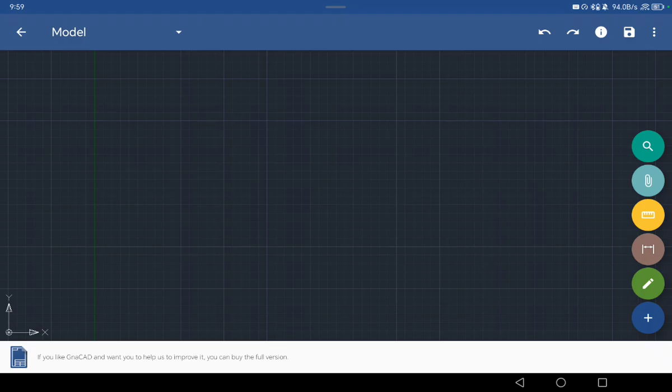So since these are modified tools, it is very essential that we have first drawn our objects or shapes. So for this time, let us use the rectangle command.

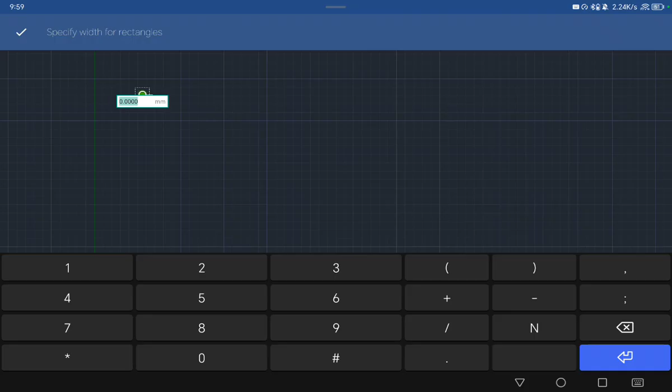Confirm check, then let's set our dimensions. Our rectangle, for example, is 300 mm. Then the width of our rectangle, let's say 200 mm. So for example, this is our object.

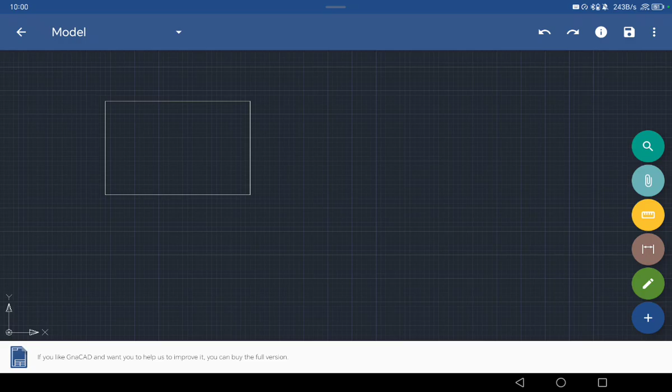Last time we also discussed the different kinds of modified tools that are commonly used. So we are going to use our copy command or clone command. First thing is to select the object, then go to the three dots at the upper right corner. Then click copy. Then, as shown in our instruction, specify base point.

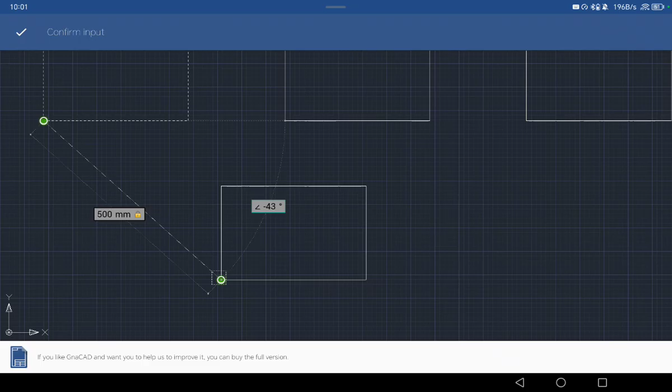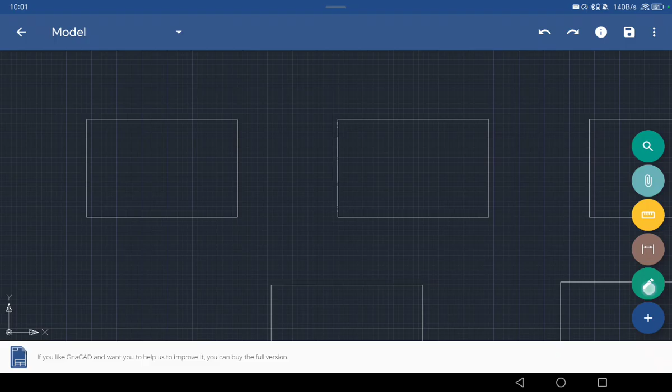First thing first, I'd like you to use this first box, our first rectangle. Since it is a modified tool, as I said, we need to have shapes or drawings ready first. So let's click here since we need a modified tool. Let's click the pen tool, then let's look for fillet first—offset, rather.

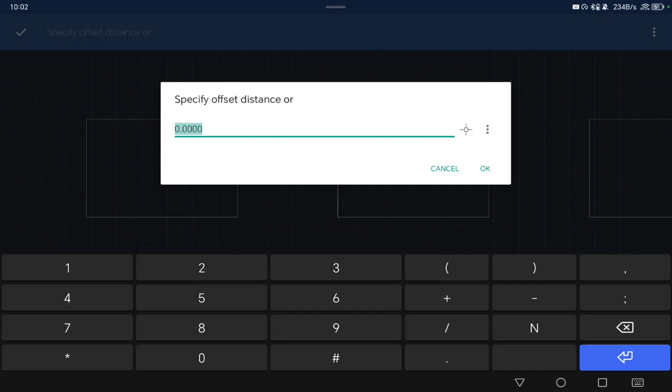So for example, this one, let's set the offset to 50. Okay, then upon setting our offset as 50, automatically this instruction appears: select object to offset. So this is what we'll use.

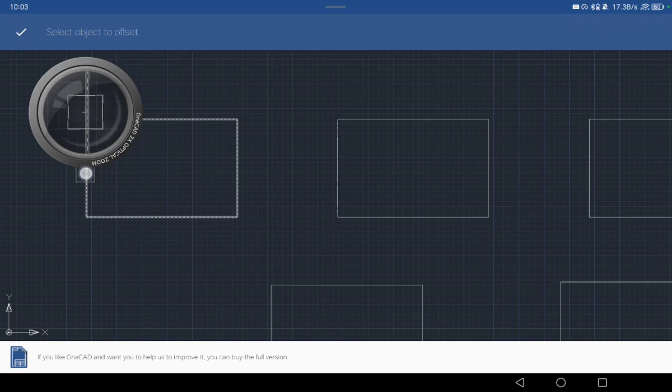Now it shows: specify point on side to offset. For example, I want to offset inside. So that is 50 millimeters offset inside. So it got removed and replaced again.

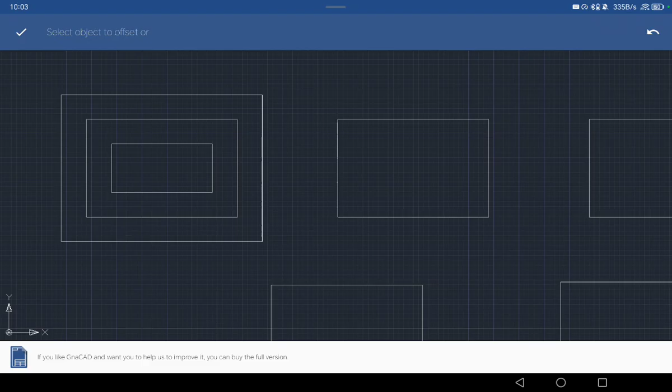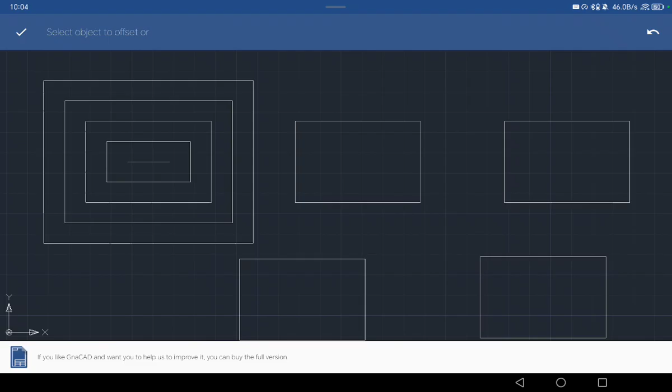Again, same sizes—same shape, different sizes, but the gap between them with each other is the same. So that's what we mean by offset. For example, the gap between this box and that box is 50. So that's what we call the offset distance we mentioned earlier—that refers to the offset distance, the gap between them.

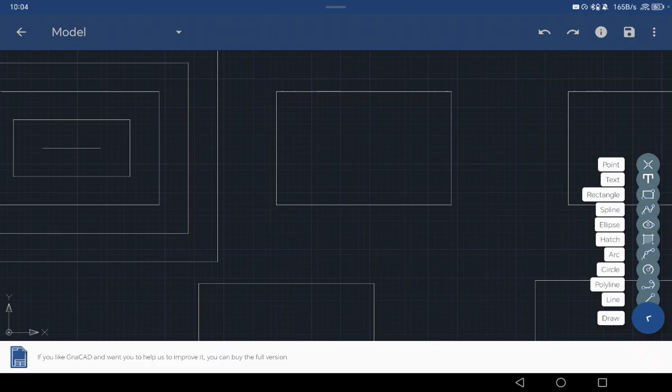Next, let us try to create a line inside this one. Let's draw, then connect here. Then we wanted to offset. These are what we can do with that.

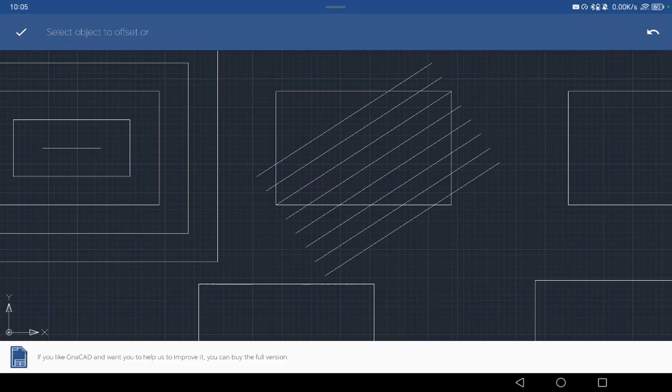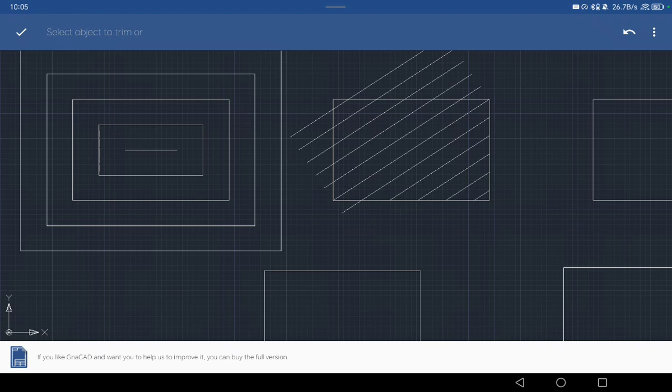Then if you wanted to erase that one, you can use—let's release this first—you can use trim. The parts that extend beyond, you can trim. During trimming or anything, we can zoom in or zoom out our drawing area to be able to maximize the functioning of our CAD.

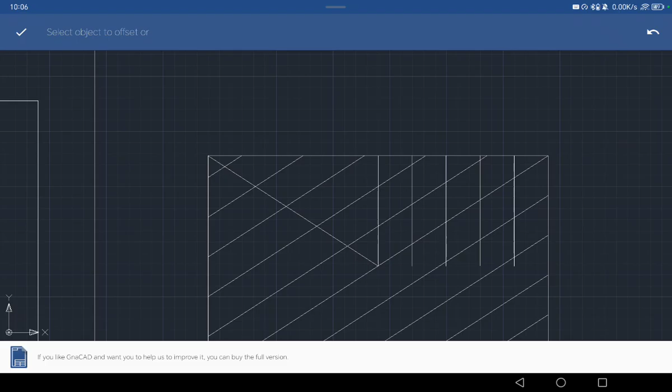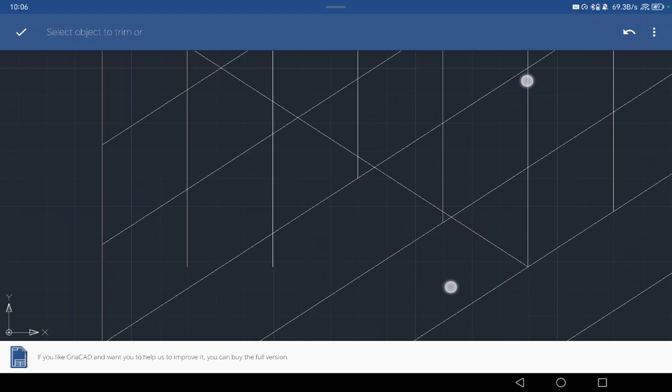Ayan, trim lang natin yung mga lumagpas. So, while you are doing this, mas marirealize mo na mas madali pa lang mag-drawing once you know yung different tools na kailangan gamitin. Like this, ito lang naman yung kailangan kong lagyan ng guhit. So, ganun. We already have our object here.

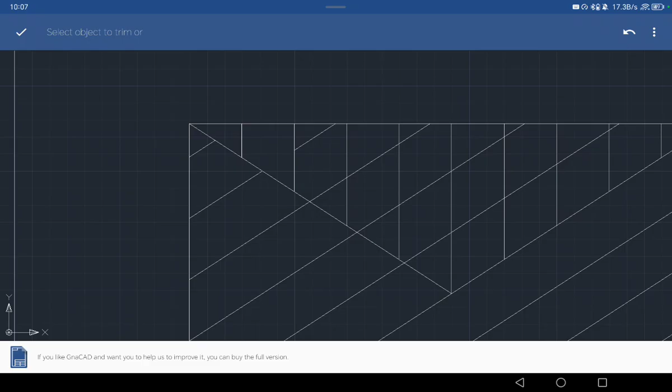So, for example, gusto kong i-erase to, i-erase din. Yan. The problem with erasing or trimming is paisa-isa pagka talaga. May time na paisa-isa ka mag-trim. Ayan po. But then, you already created yung object mo. So, that's it, that's offset for you. Kung may application yan by next time, tuturo ko sa inyo yung pinaka-application niya once we started creating floor plans. Next, we have here another box.

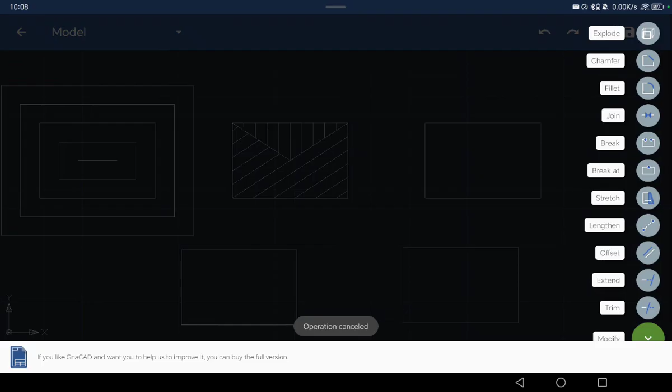Then, we are going to use itong ating fillet. So, pag sinabing fillet, we are going to turn yung corner nito as a rounded shape. So, by default, halimbawa, ayan na, cancel ko lang. By default, pag ito yung fillet natin modify tools, tapos fillet. By default, ito yung pinaka niya. Select first line or we have options here.

Pwede pong polyline, pwede tayong mag-radius, pwede tayong mag-trim, pwede tayong mag-multiple. So, when we say trim, magpuputol lang tayo, magtatanggal tayo, magbubura tayo. But I would like you to use yung radius. Ito yung pinaka-commonly used talaga dyan. Radius.

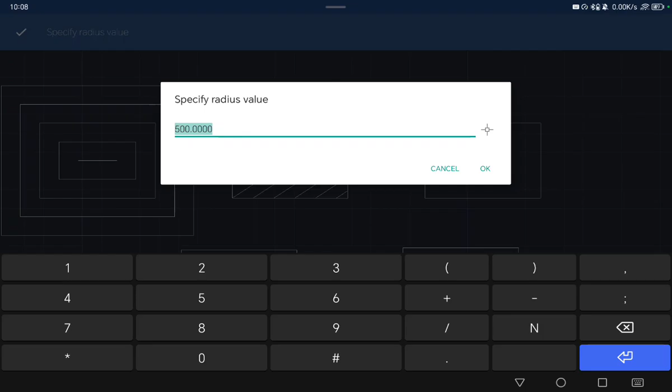So, sa radius, nakalagay dyan, specify radius value. We can change that one. For example, I wanted to change it to 100. Ayan po. Proceed na tayo dito. Specify first line.

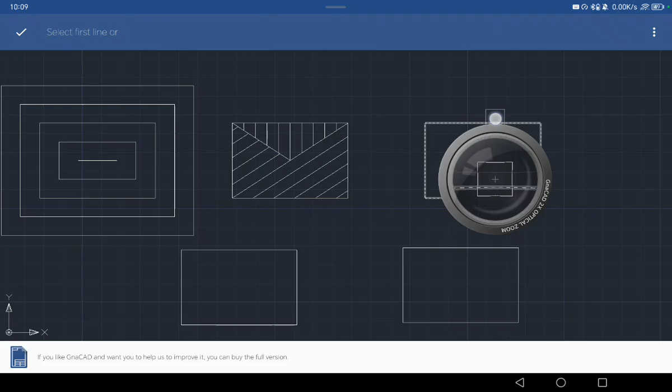So again, hold natin siya. Specify niyo lang nasaan yung first line na gusto niyo, yung side na yun. Once again, kailangan makita natin na naging putol-putol yung linya bago natin i-release. Once release, ito yung lilitaw. Specify, select second line. Ito yung second line natin. Then, release. See? Ito po yung itsura ng ating fillet.

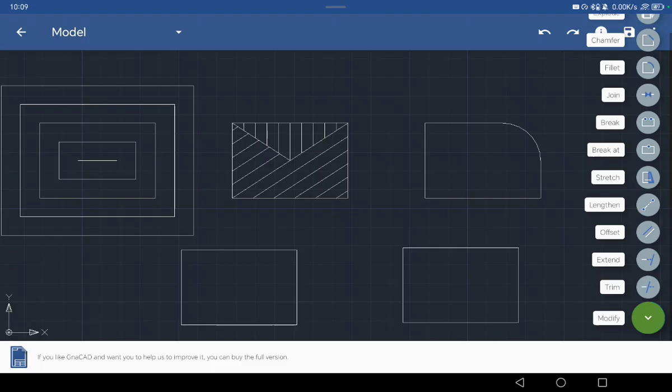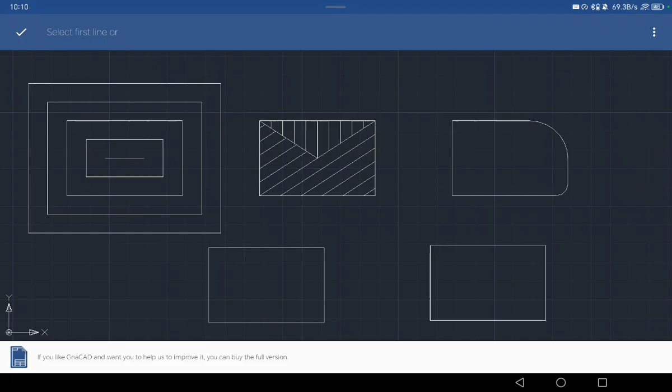Ni-fillet natin siya, ni-rounded natin yung edge niya. Okay, ulitan natin, sample na naman ng fillet. This time, babaguhin natin yung radius niya. From 100, gagawin natin 30. Tapos, itong side naman na ito, yung i-fillet natin. First side, ayan po. Second line. Yun, medyo rounded na yung shape. Then finally, fillet natin. Tapos again, change natin back to 100.

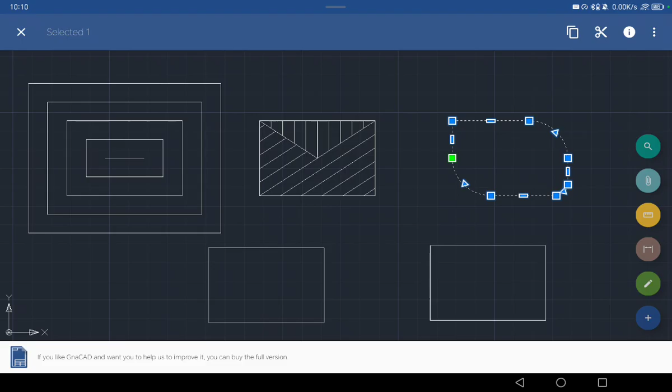First line, second line. Okay. So, we have here our object na. Then once again, this is still a polyline object. So, one entity pa rin siya. Pag sinelect natin, it is still one object pa rin, one entity pa rin.

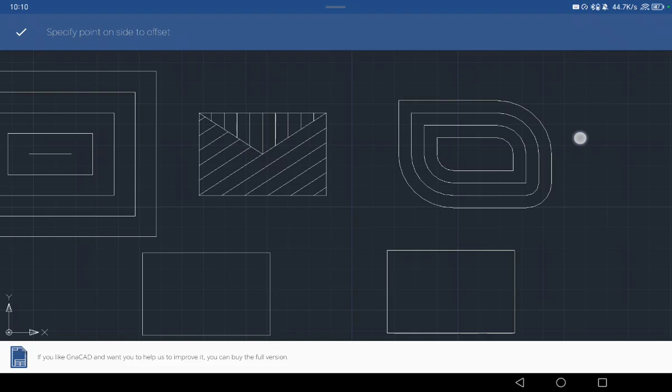Okay, next. Ano natin yan? Offset natin yung object natin. For example, I wanted to offset it by 30. Okay, sige, 30. Select the object, offset, paloob. Select the object, offset, palabas. Di ba? Until such time na wala ka nang medyo offset talaga, yun. Tumabingi na siya kasi nga hindi na ma-offset.

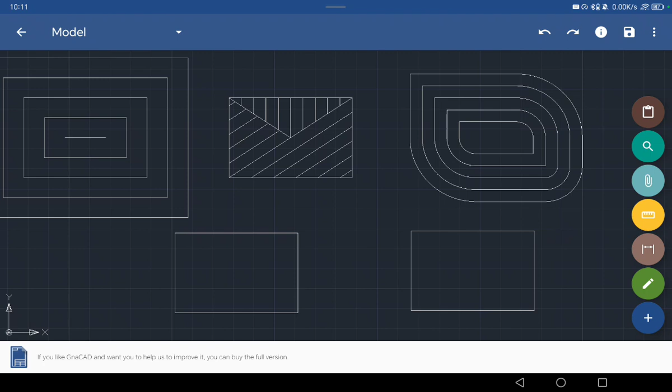Try nating i-regen. Yun na, hindi na niya ma-offset yung rounded part ko. So, pwede na nating burahin tong nasa gitna. That is how we are going to use or utilize yung ating offset command at yung ating fillet command. Then, the last command that we have is yung chamfer po.

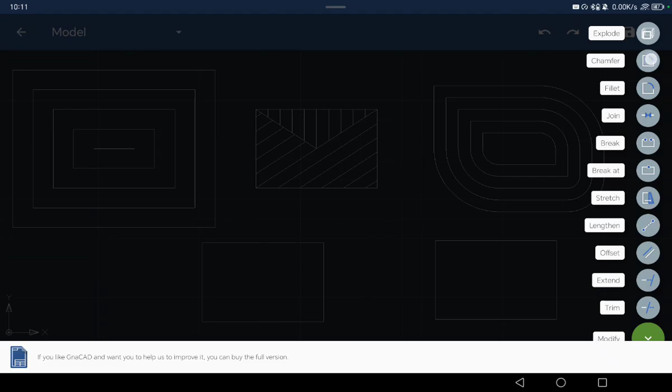Actually, chamfer and then fillet is just almost the same. The differences between the two is yung shape niya. Kung sa fillet natin, nira-rounded natin yung edge, o yung corner ng object. Sa fillet yun, nagiging rounded yung corner ng ating object. Sa chamfer naman, natatapyas, napuputol yung corner ng ating object. So, sample, yan po. Again, balikan natin.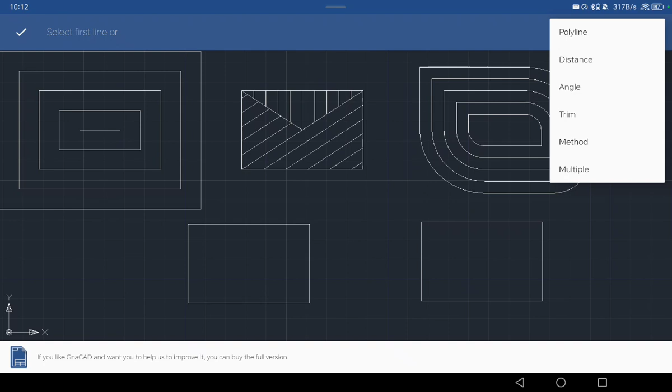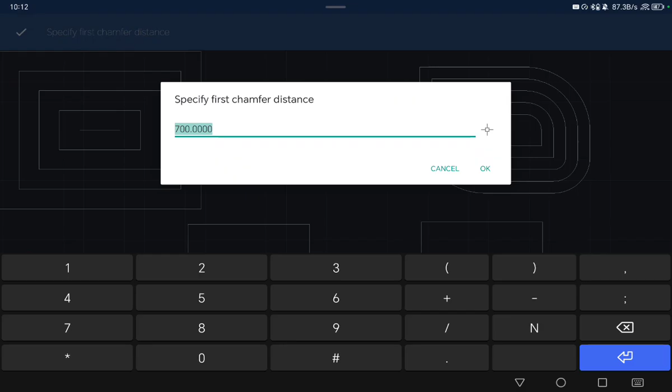Go to chamfer, then ito po yung magiging command line natin. Select first line, or we can also click these 3 dots for the different options. This time naman, nakalagay dyan, polyline, distance, angle, trim, method, and then multiple. But then, we are going to use yung distance lang po. When we talk of the distance, yun lang naman yung magiging pagitan mula dun sa pagpuputulan, yung kabilaang dulo.

So, try nating mag-insert dito ng 50. Tapos, enter. Tapos, dito ay 50 din. Enter. Tapos, ito po yung select natin. Yan, select first line, click. Tapos, pagka-release mo, ayan, select second line. Ito po, click. See? Naputol.

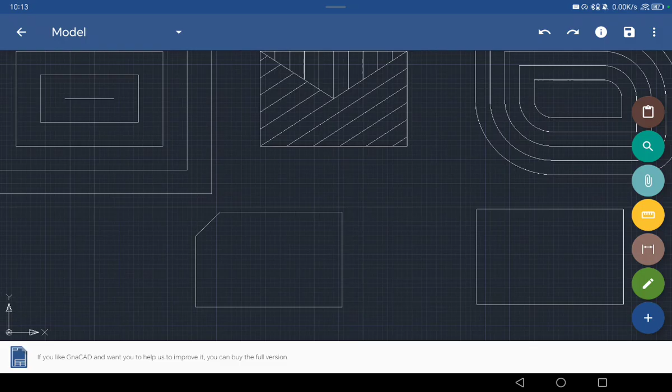That's how we are going to create yung ating object niyan. Tapos, select natin, it is still a polyline. One object pa rin po siya. Naputulan siya, natapyasan, pero one object pa rin siya.

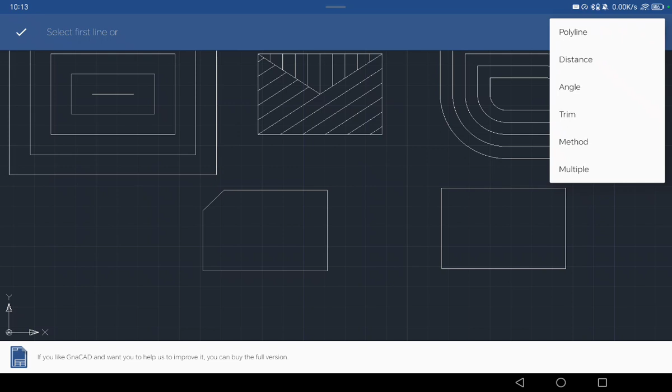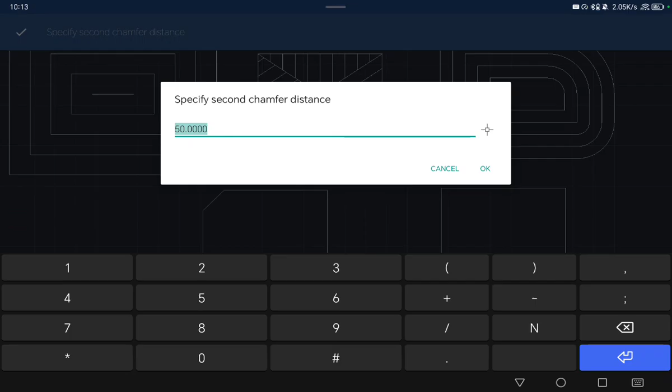So, again, chamfer tayo. Baguhin po natin, distance. Instead na 50, gawin nating 50 yung kabila. Ayan. Tapos, the other one, wait, ulitan natin. 50 yung kabila, the other one is 20. So, select natin to, then select po natin dito. Okay, so yan po yung ating magiging itsura.